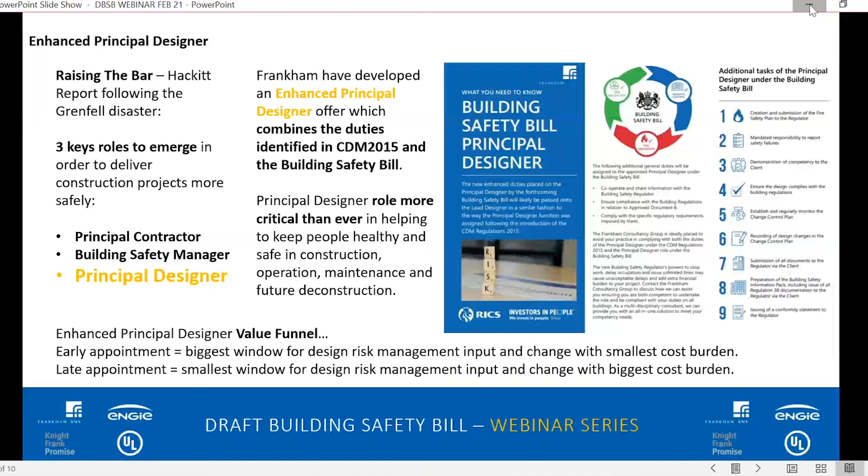So is my presentation going down because it doesn't? My presentation is not moving. If you just click the button where it looks like a little square with legs. Yeah, that's it. I think I've done it there. For some reason it wasn't working automatically.

So this slide is around duties and tasks of the principal designer. The same exists as under CDM 2015, in as much as it's about cooperation, communication, collaboration, and coordination with others.

The construction control plan, or the fire safety plan, is the start of the golden thread of information, and that's produced within Gateway 1. We also look at compliance and assurance in terms of complying with building regulations, with CDM 2015, and the building safety bill itself. And we also start to look at change control by helping draft the change control plan.

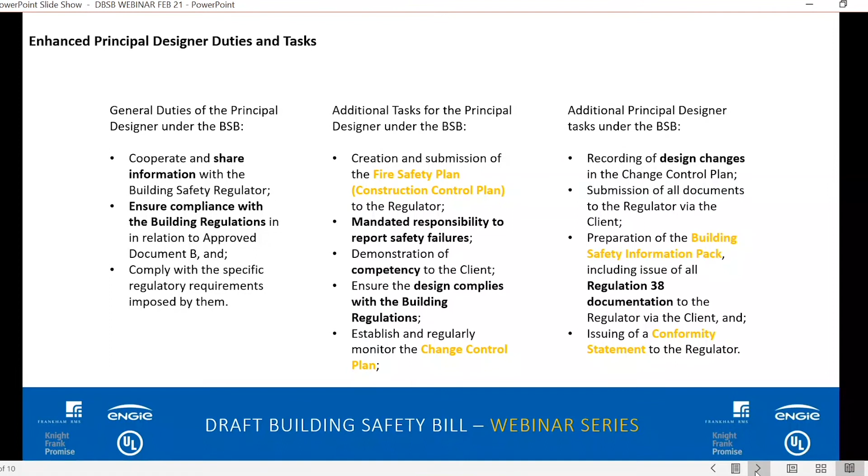And then another duty and task would be the building safety information pack, which is akin to the health and safety file under CDM 2015. Within that, we look specifically at Regulation 38 documentation, which I'll come on to shortly, and also the statement of conformity, or conformity statement, that goes to the regulator as well.

These are the three gateways that Lucy mentioned before. Gateway 1 is essentially pre-construction or planning, Gateway 2 is the construction phase, and Gateway 3 is completion and handover. So this slide really just represents or identifies our involvement as principal designer at a high level across all three gateways. You can see the text there in gold represents the golden thread information to show how and where it fits into the wider piece.

So you can see in Gateway 1, we're drafting fire safety plans or construction control plans, the fire statement which Lucy mentioned, the change control plan, and then we're submitting all these plans to the regulator. Within Gateway 2, we are looking at change control and how we record, track, manage and monitor design changes and how they are agreed.

And then in Gateway 3 at handover, we're looking at handing everything over as a pack to the regulator, as well as the conformity statement and declaration to the regulator. And then we're also advising the client with regards to occupancy and arrangements required by their accountable person and the building safety manager.

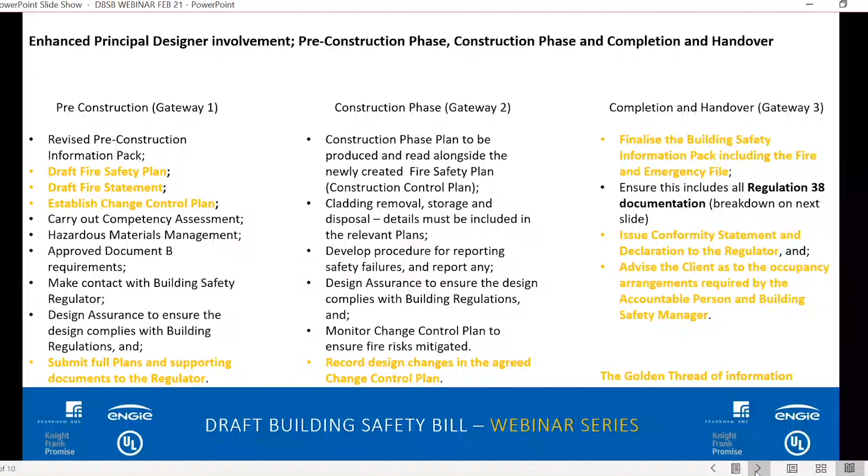This slide really gives examples of what's included within the Regulation 38 pack contained within the fire safety pack at completion at the end of Gateway 3. It's far more in depth than what is generally included in health and safety files under CDM 2015 when it comes to fire safety. The important bits to note are the bits in bold.

So we're looking for information about escape routes, fire separation, fire door sets, detection, call points, control boxes, sounders, signage, lighting, firefighting equipment in terms of extinguishers, smoke control systems, and then any specifications that have been provided for equipment, as well as any provisions around safe evacuation of people with disabilities, which the building safety manager would need to manage.

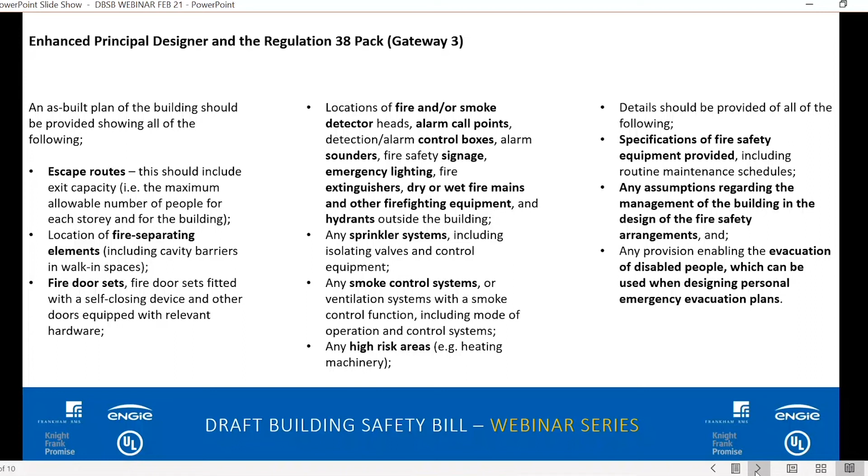This next slide just demonstrates the relationship between the design and construction process as defined by the RIBA plan of works and how the golden thread of information fits into that. I appreciate the detail is small here, but essentially what this slide shows is that within RIBA stages 1 to 4...

...so preparation and briefing, concept design, spatial coordination and technical design, that's really referred to as Gateway 1 within the Building Safety Bill. And within Gateway 1, we're talking about drafting the fire statement, finalising and submitting safety plans to the regulator, establishing change control processes and plans, and submitting those documents to the regulator.

And then within RIBA stage 5, which is Gateway 2 construction, we are looking at recording design changes, agreeing those changes within the change control plan, and just managing the design process in the same way that we do within standalone CDM 2015 projects. And then finally, RIBA stage 6 handover, that's Gateway 3.

And here we're talking about finalising building safety information, Regulation 38 packs, etc, jointly signing the conformity declaration and statement with the principal contractor, which states that the final product has been constructed in accordance with building regulations, and submitting all of that to the building safety regulator for their review.

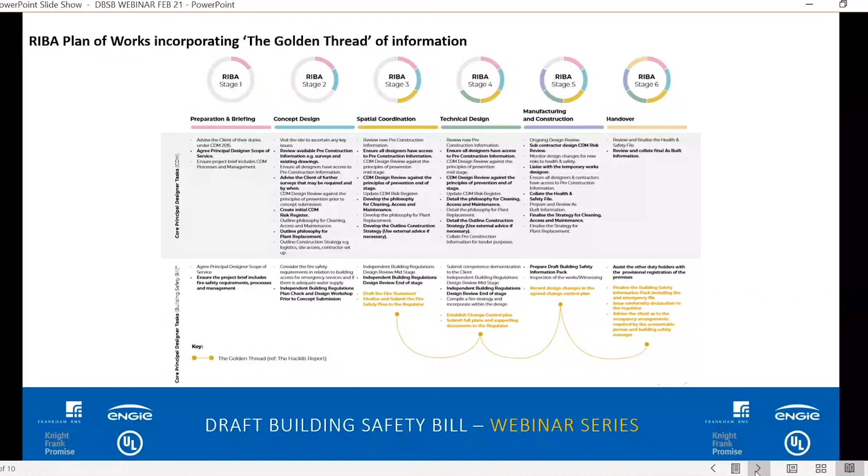Next slide is around change control and the change control process, and the role the principal designer has within this. Change control is key within any project, so it's a key piece of information for us. It describes how building safety and building regulations compliance will be maintained and achieved during construction, and how changes will be controlled and recorded. It's read alongside the construction control plan, which is the fire safety plan, as well as the construction phase plan. And as with all construction phase plans, this is a live, dynamic document that needs to be fed into at various points in time.

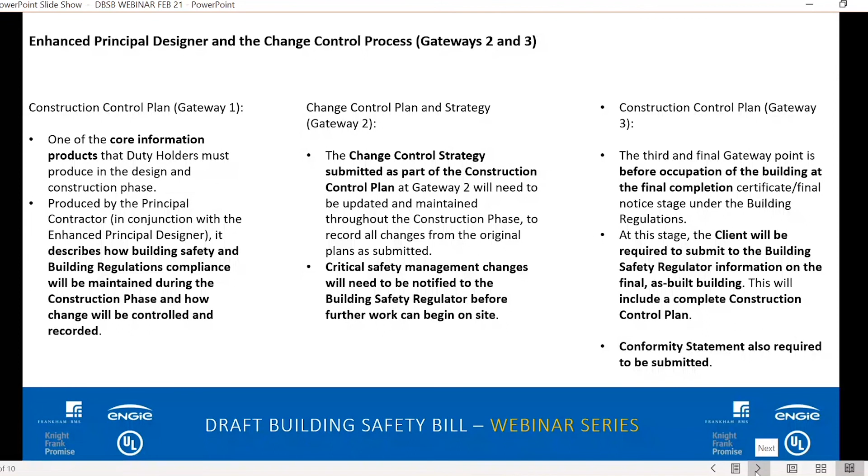Before handover, the statement of conformity will be signed and submitted together with a complete construction control plan. It's essential that the principal designer feeds into design change discussions, and that the impact design changes may have on health and safety in construction, operation and maintenance are considered the same as under CDM 2015. However, in this instance, the requirement is to formally record and notify the building safety regulator of critical safety changes, which is a significant difference from CDM 2015.

A bit more about change control and competency. The ethos of the CDM regulations, in all their iterations from 1994, 2007 and 2015, has always been about the provision of the right information for the right people at the right time. It's always been about the management of significant risks. However, CDM 2015 shifts that focus onto foreseeable risks, and clearly it can be argued that anything is foreseeable. That's another discussion - was Grenfell foreseeable? Yes. Was this foreseeable risk considered at the time? Possibly - otherwise we possibly wouldn't be in the situation we are. That's not really for me to answer, though.

It's also important to note that within change control, design risk management is an iterative process that evolves as the design and project progress over time. The Building Safety Bill brings input around design risk management into sharper focus too. Conformity statements help justify design decisions, and the things that feed into the conformity statement being signed are all your traditional design risk management tools - design risk registers, design team meeting minutes, CDM risk workshops, design decision logs, design gateway reviews, and other such tools that CDM consultants utilize.

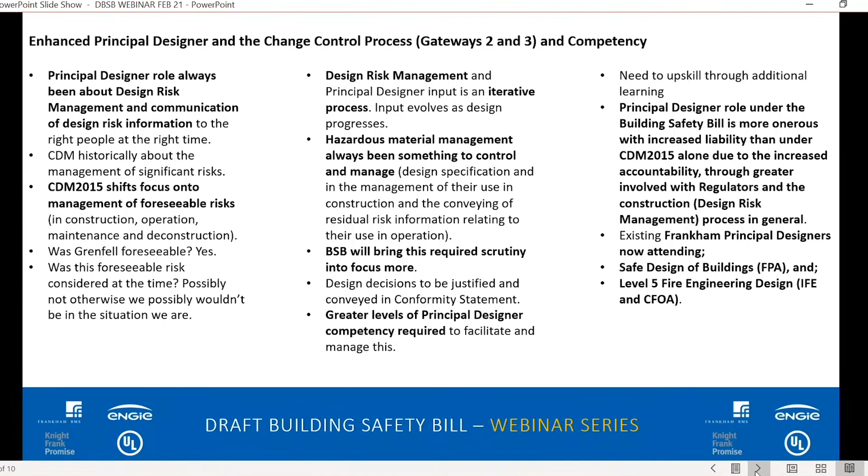To enable all that, what's required is a greater level of competency, because the role is more onerous than the principal designer role under CDM 2015, and therefore carries with it more liability. It's important to upskill existing CDM consultants as necessary. So we've taken a decision at Frankham to put our CDM consultants and principal designers on the Institution of Fire Engineers Level 5 Fire Engineering Design course. We've also sent them, or are in the process of sending them, on the Fire Protection Association's Safe Design of Buildings course. The Level 5 IFE course is, I think, a four-module, year-long course. It's a big investment in finance, time, effort and energy from the people who sit the course, but we believe it's the right way to respond to the Building Safety Bill and the requirements imposed upon the principal designer.

The next slide is associated with the conformity statement that is signed at the end of Gateway 3. As I mentioned previously, it's the final piece of the golden thread of information, and the principal contractor and the principal designer both sign the declaration jointly. So there's joint accountability, joint liability in confirming that the product is built in accordance with the building regulations and fully complies. It's up to the building safety regulator whether they decide to accept the conformity statement or not. And it's really important to point out, as Lucy mentioned earlier, that we're being told the Building Safety Bill will be enforced far more stringently than perhaps the CDM regulations have been in certain areas. So I think that's a huge change coming.

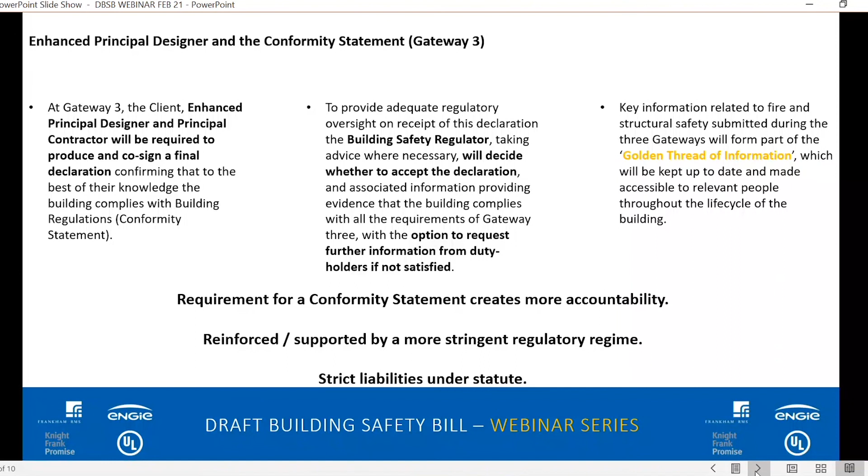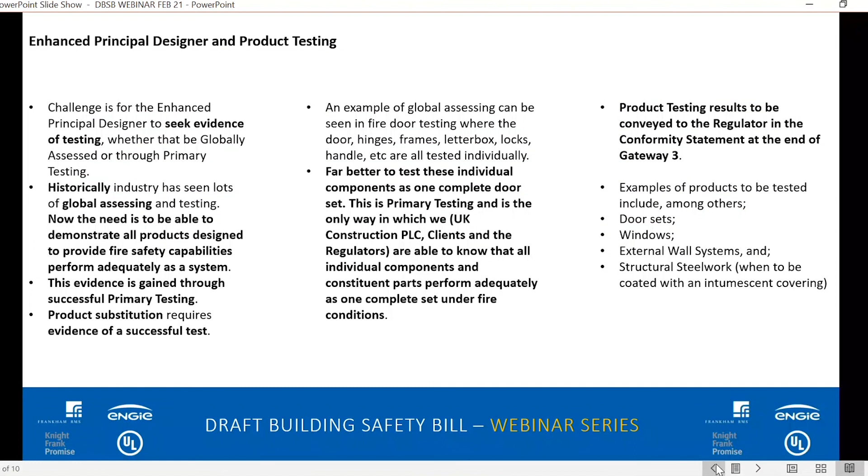Obviously global assessment and testing still occurs, but in all cases of testing, the results must be conveyed to the principal designer, and then also conveyed to the building safety regulator. And that concludes my presentation. If there are any questions, I'll happily take those at the end of the session.